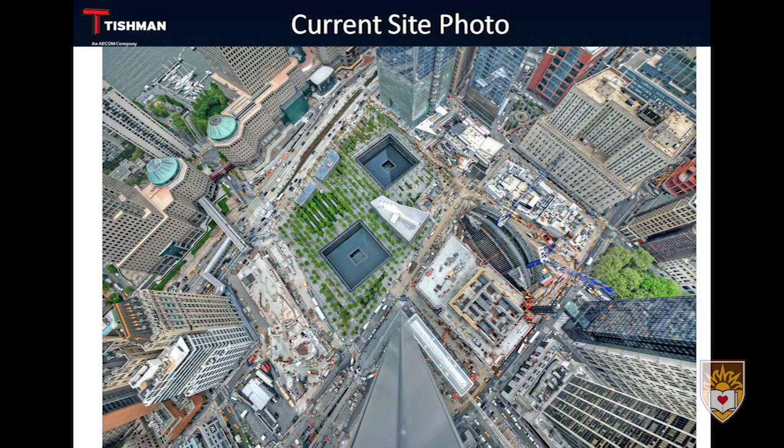Now, looking in plan view, I want to describe the complexity of the project. Most people don't realize that there's multiple projects. At the time of 9/11, the goals of the project were varied - there were conflicting groups that had different needs.

Obviously, first and foremost is to have a memorial and a museum to pay respect for the events of that day. Additionally, there was 10 million square feet that was lost, so that had to be replaced. It was always a transportation hub, but now they wanted to make it much more obvious. Something that was an afterthought in the original Twin Towers was the retail - turned out the retail was incredibly lucrative, so that became a #1 goal of the site.

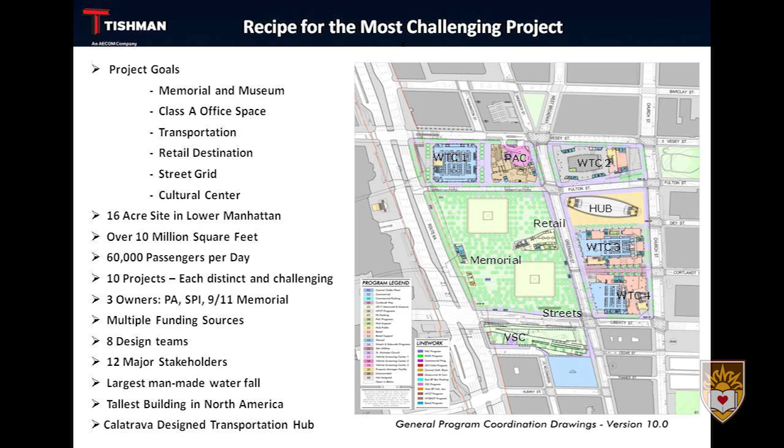They also wanted to reestablish the street grid. Originally there was a super block that came all the way around here - there were no streets coming through it. The urban planners felt that this kind of disassociated the site from the urban environment, so they reestablished the street grid back through the site here. This will be a walkway as well.

Again, I want to look below grade. Above grade, you saw individual buildings that look like a series of different projects. But really, below grade, you can see how the program spaces are all intertwined. You can't really tell how one building starts and another finishes.

You can see that at the lowest level, there are 4 levels below grade, a total of about 75 feet from street level. So it's 6 stories, but there's 4 levels below grade. The different colors represent the different program spaces.

There's bus parking through here in this pink color. Here's the railroad tracks that go to New Jersey, the PATH station. These are the outlines of the memorial pools, you can see them here and here. This is the lowest level where all the mechanical spaces of the building are, as well as loading docks.

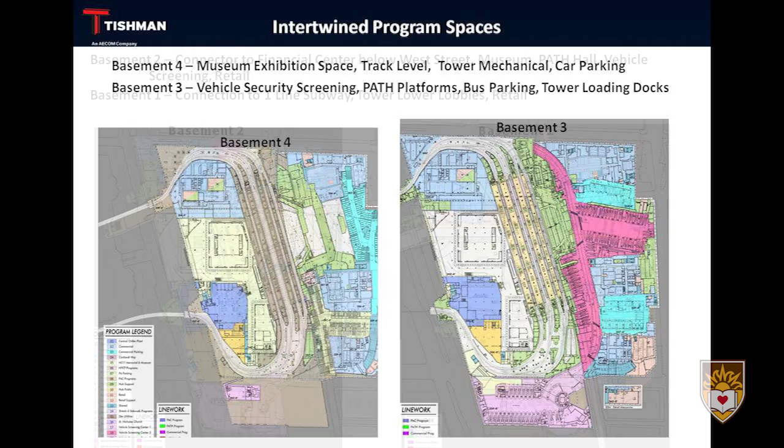As you move up the next 2 levels, this is where the retail space is, and you can really see the salmon color is all retail space. The transportation hub runs across the site. That's really what makes the site very unique, that the transportation project, although there's multiple designers and design teams, runs entirely through the complete site.

Very challenging, because there's a designer here, a world-class designer, Norman Foster, Maki, a Japanese architect, David Childs. So they're all very powerhouse architects, and they all wanted their building to be the way they wanted it. To get them to agree on below-grade space was a challenge, to say the least.

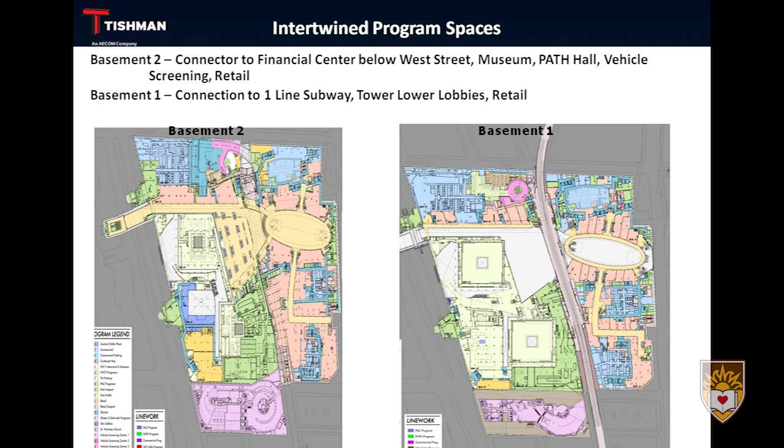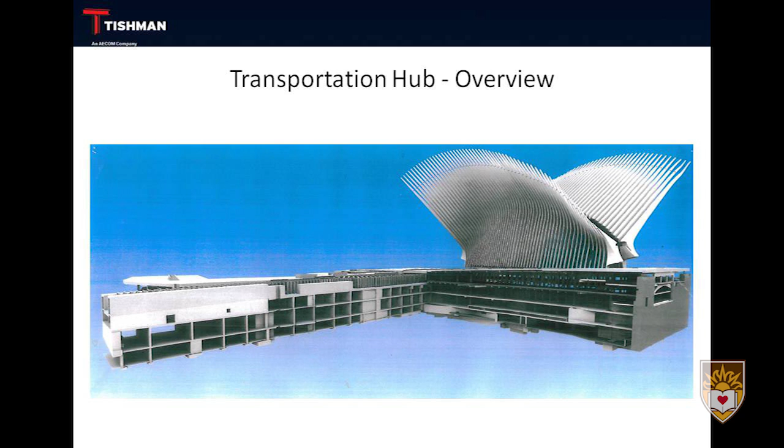To talk about the transportation hub specifically, this is just a model that gives you the idea of it in 3D, how it spans across the site. First, I just want to give you an idea of what the transportation hub is. Most people don't really know, they just think it's a train station. And it really is that simple, but above grade, this is what it appears to be.

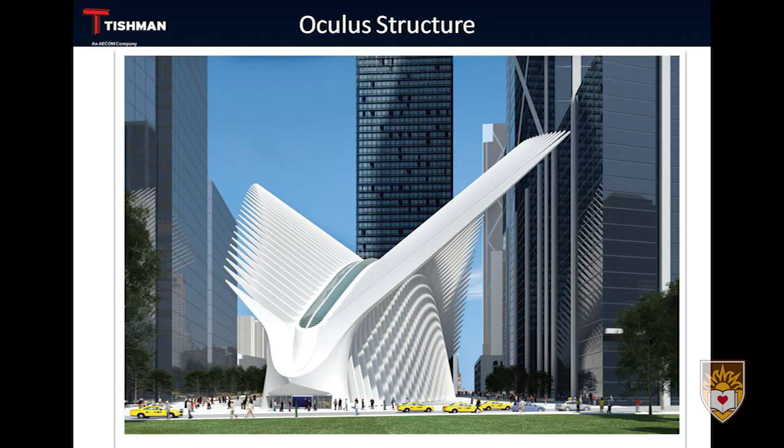Santiago Calatrava is the designer. He's a fascinating individual, an architect as well as a structural engineer and a sculptor. You can see through his space, this is all structure that he wants you to be able to touch and see, but these are actually steel pieces, going up all the way to the skylight, which opens. He wanted to create an expansive space.

He used light to make the area much freer and more welcoming. And it's at 2 levels below grade, so that was quite a challenge, to be able to introduce light into the space. The skylight, which you see here, does open, and it will open on 9/11.

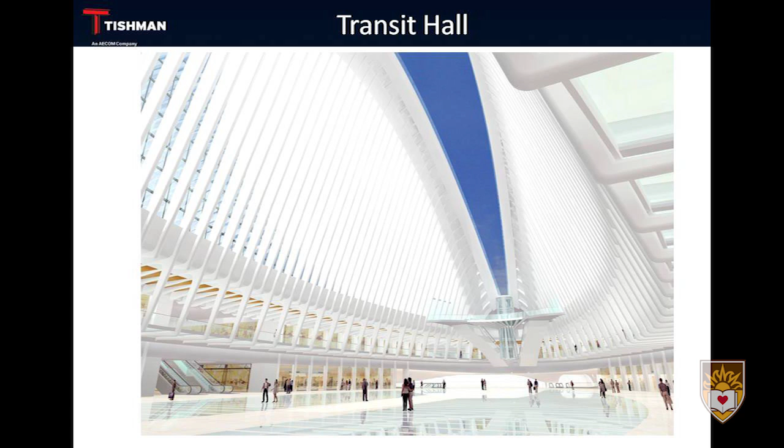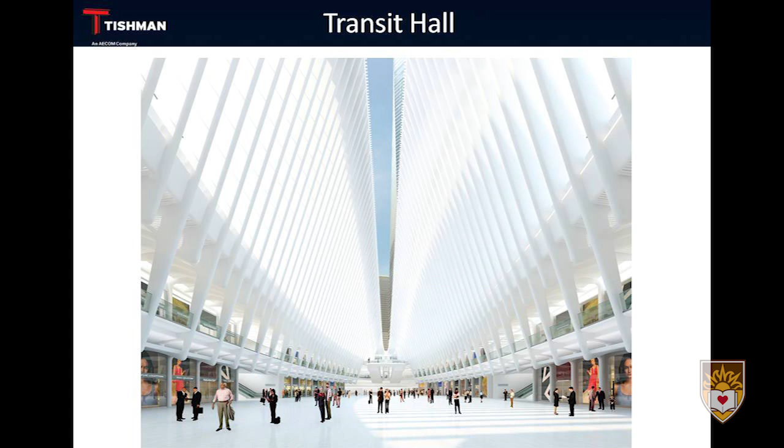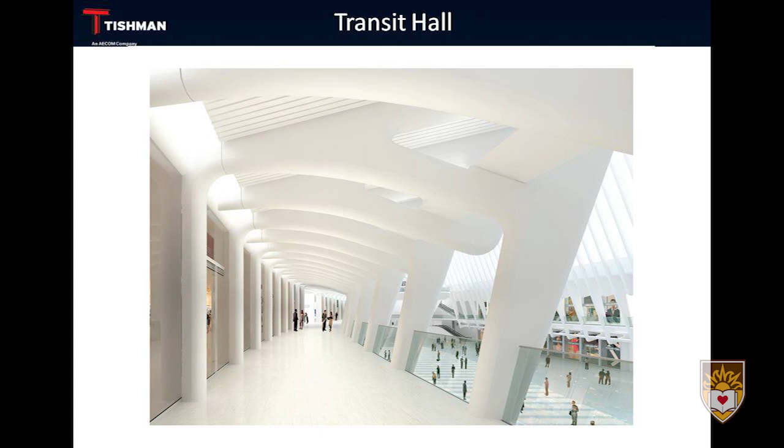Again, another view inside. And as I go through these renderings, we've finished some areas, and I've taken pictures of the actual site, and the renderings and the pictures are, sometimes I can't tell the difference. So it's coming to life very quickly.

So again, I want to emphasize how the transportation hub runs throughout the entire site. In this tan color, it goes from the World Financial Center across the West Side Highway, past Tower 1. Here's the PATH Hall, which is the mixing area for people taking trains to New Jersey, and the Transit Hall, primarily a retail space, through Towers 3 and 4 and Tower 2.

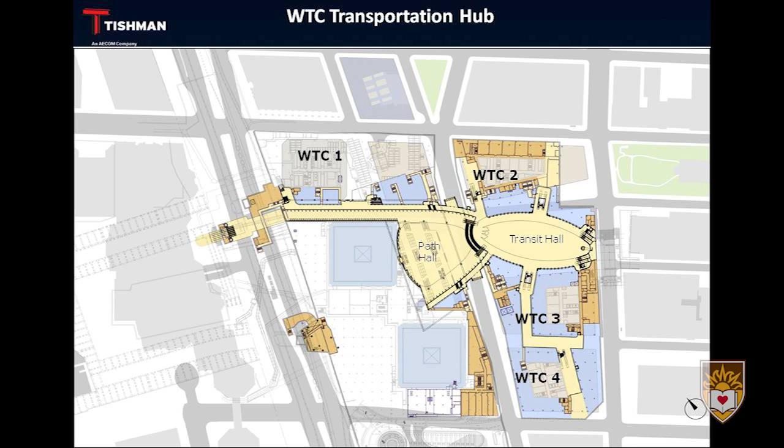Now these towers all have different owners. Towers 2, 3, and 4 are owned by Silverstein. Tower 1 was originally controlled by Silverstein, but it was turned over to the Port Authority. So the whole idea of having this retail space with these 10 million square feet that we'll reestablish, with retail running through on every level, is really one of the driving factors of the below-grade program space.

Just another cross-section that shows some of the complexity. The building actually attaches to and connects to the MTA programs, the Fulton Street station. So this is a unique situation where the Port Authority and the MTA, two government agencies, actually cooperated and worked together to develop this connection point.

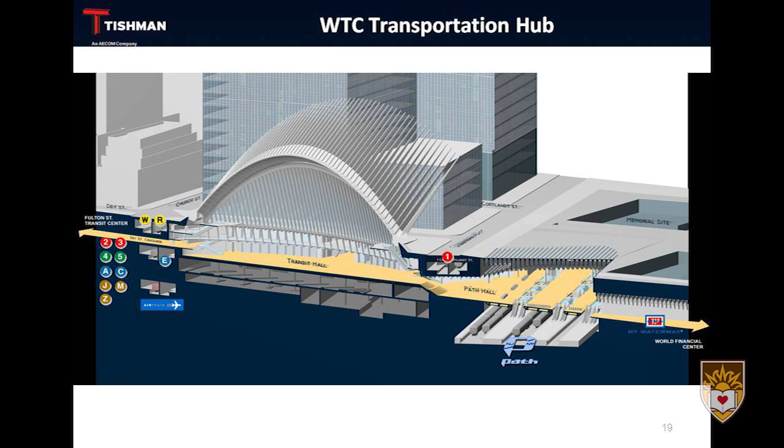So it's now possible to go from the World Financial Center and walk across the site, and even all the way to the East River across Lower Manhattan, below grade. And you can shop the whole way. This is looking further east, the other stations that were done by the MTA, projects that were coordinated.

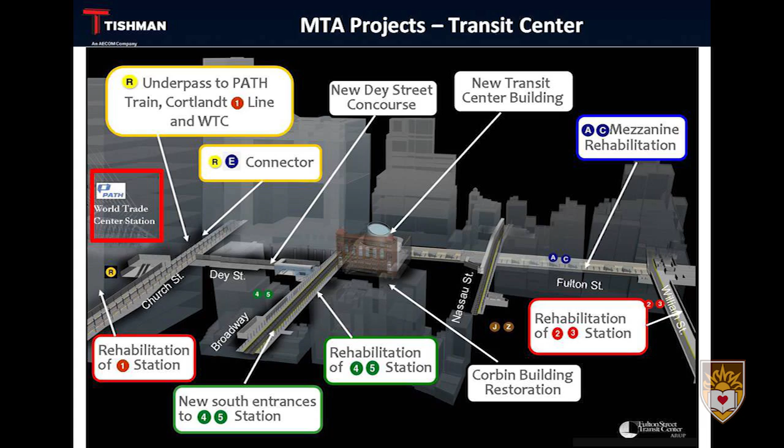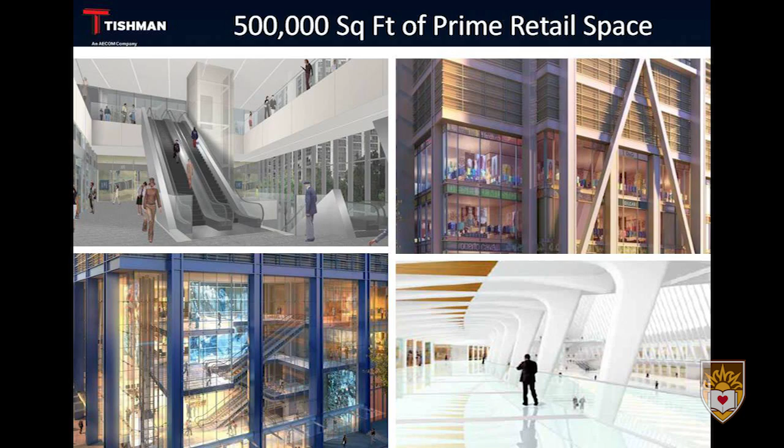Again, I just want to emphasize that retail is one of the critical pieces of the project, one of the main goals. So in each of the buildings, even above grade, there'll be retail space. And don't forget that it's a train station, an active train station. We're building this ginormous project in and around the existing PATH station running through.

So I want to just focus in on little engineering topics. First, Greenwich Street Corridor, which is top-down construction, a kind of unique way of building a building.

So Greenwich Street is this section running right through here. Below it is the one-line subway. You can't see it, but directly below here is the one-line subway carrying, I think, 20,000 people a day. It's up on piles right now, at this point in time, going back to 2009.

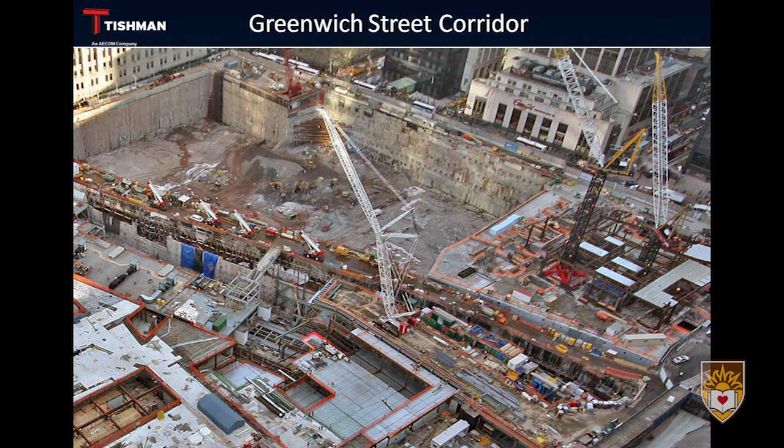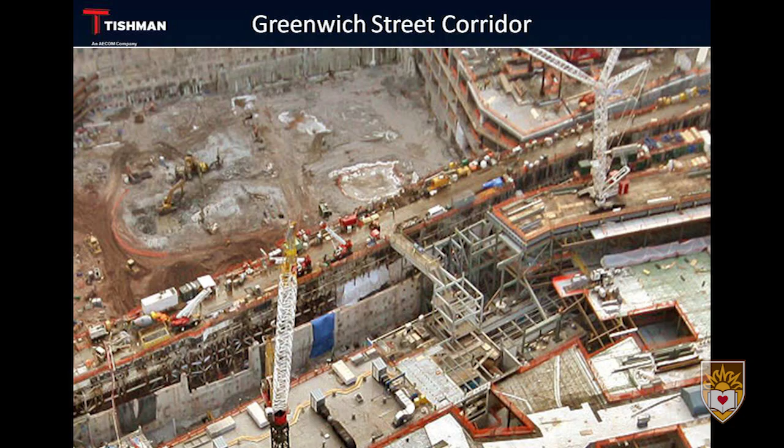Just zooming in, you can start to see these piles which temporarily supported it. The one line was designed to be sitting on earth, and we needed to excavate below it while the trains were running through it, and insert, if you will, slabs - 4 levels of slabs.

Another view from the opposite side, it's 1,000 feet long. This is where Tower 2 will be. This is where Tower 4 is. It's built. This is Tower 3. And you can see all the stilts, but there's all earth underneath the structure.

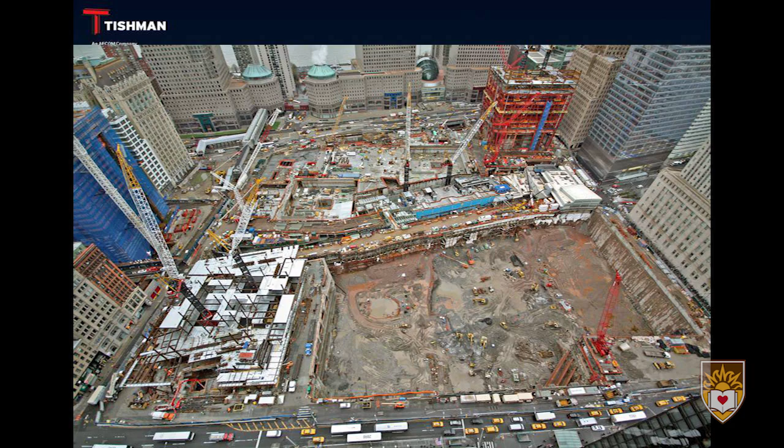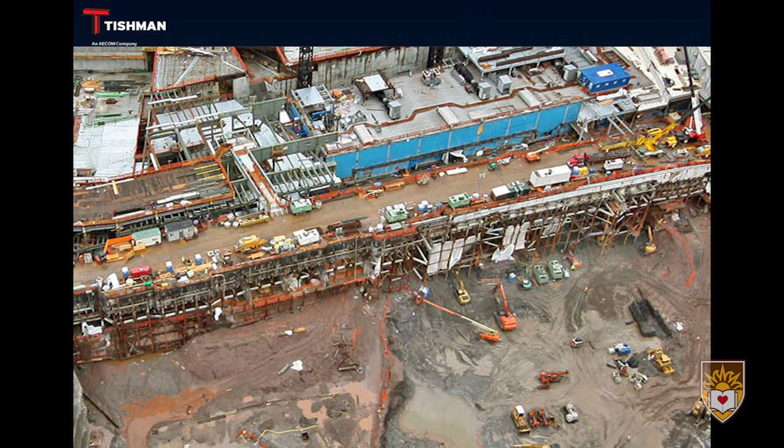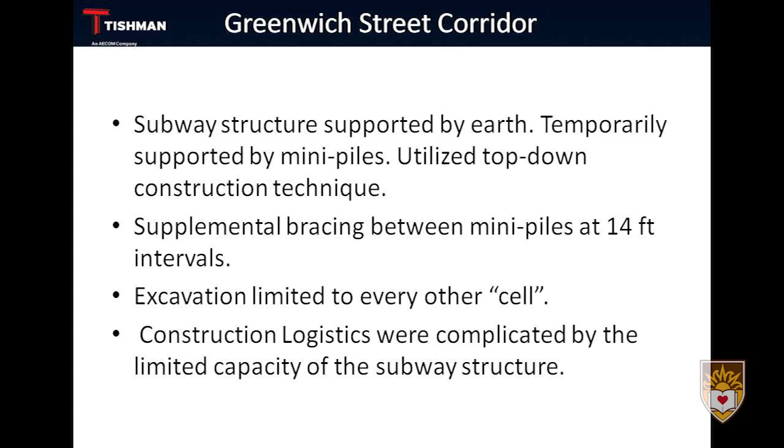As you zoom in, you can kind of see the structure. Top-down construction is where you build one level at a time. You excavate underneath that slab that you've placed, take that earth away, and then build your next slab, and again repeat that - excavate underneath.

It's a little counterintuitive, but the alternative would have been to excavate all the way down with temporary support, as you see something like this, and then build back up, and that would have delayed the project by at least a year. So we came up with the idea of building on our way down.

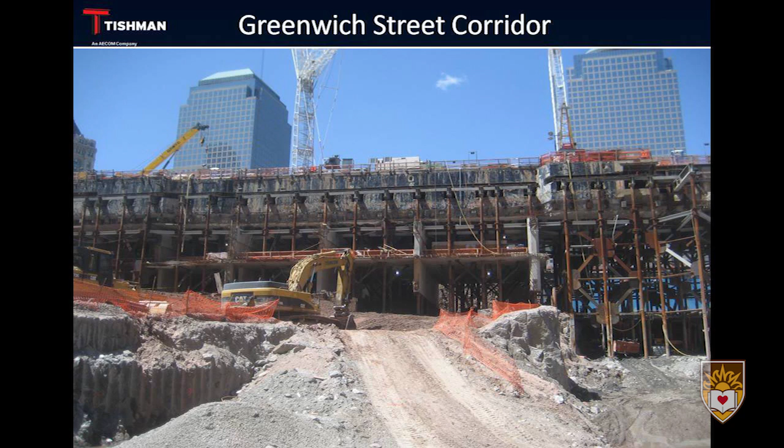And here you get a sense of it. You see this slab here, and there's a wall, and as we zoom in, the wall is just kind of hanging in the air. It's a little surprising. It hadn't been done in New York City. There were a lot of people who were doubting that this would actually work.

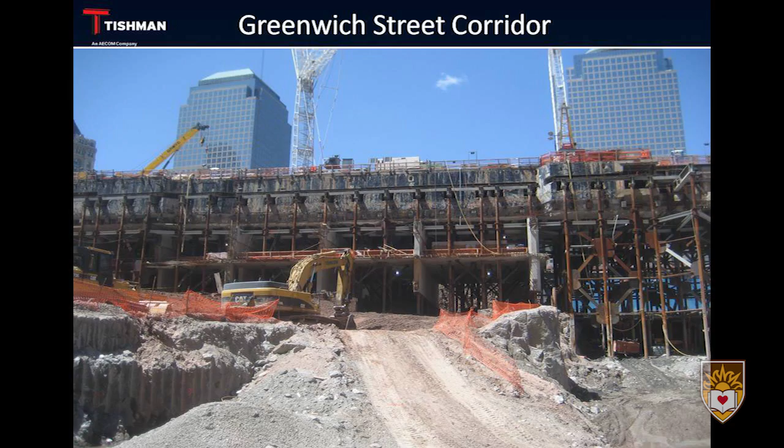You can just see the construction, the excavation, as we're digging underneath the slab and continuing working our way down. Very unique construction. And in this area is a complete bridge, so we have it fully supported, and then we continue to excavate. We used explosives at this base while the trains are running through here 75 feet above.

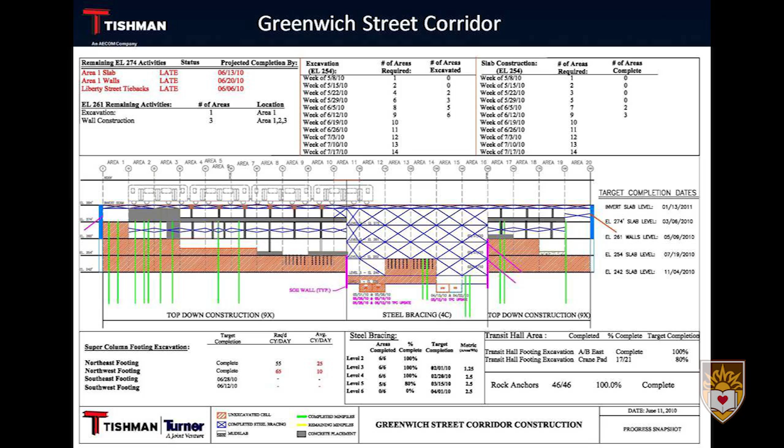This is how we'd keep track of where we were on schedule. We would walk through weekly with the director in the mud, identifying where we were on schedule, whether we were delayed. You can see that in red, we tracked it day in, day out. It was very challenging to have, under that kind of pressure, to be able to walk the site and assure them that we would get this structure completed in time for the 9/11 memorial opening.

So this just keeps continuing, just the difficulty in excavating below and within the structure and the type of environment that we're building under.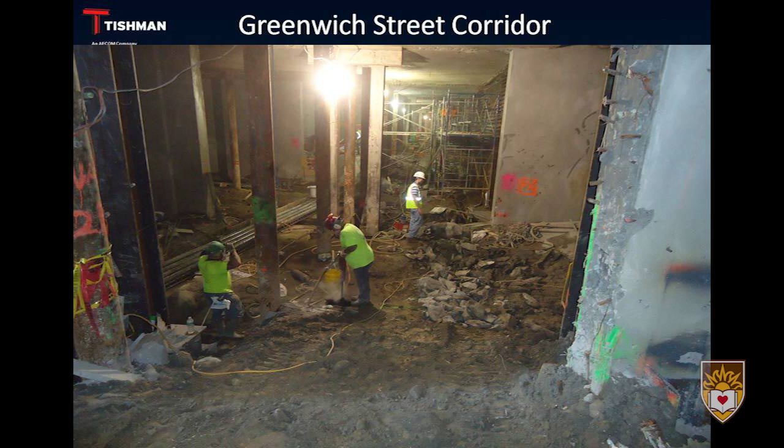A lot of work is done by hand. You would think that in this day and age, with all the technology, that construction would be done in one rapid way, but this little Bobcat had to take out 25,000 cubic yards. This carries a third of a yard. So it's like digging a swimming pool with a teaspoon. And we had 10 of these zipping in and out of the site, bringing it out to an area that would be loaded out.

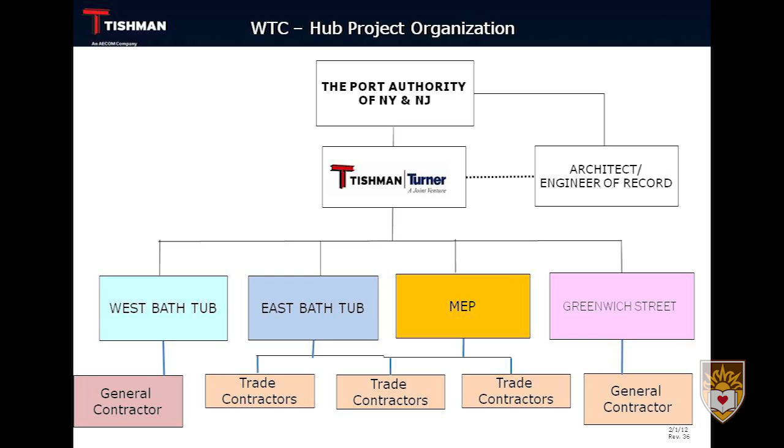Just a little bit about our organization. Something that's unique is that the Port Authority typically deals with a general contractor. In order to proceed, the West Bathtub was required to meet the needs of 9/11, which we'll talk about a little later. The East Bathtub, we decided to go trade-by-trade contractors because at the time, Silverstein was not proceeding with their buildings. So we said we could build trade-by-trade and allow the project to move forward somewhat in pieces. So when we came on the project in 2009, Tower 1 was just coming above grade.

What happened was that in 2010, we had just started on the project, Tishman Turner, as a joint venture. After 2008, Silverstein decided not to build his 2 projects. The hub had terminated the contractor who was doing this - it was a general contractor. And we came in and said, okay, this needs to be finished by 9/11.

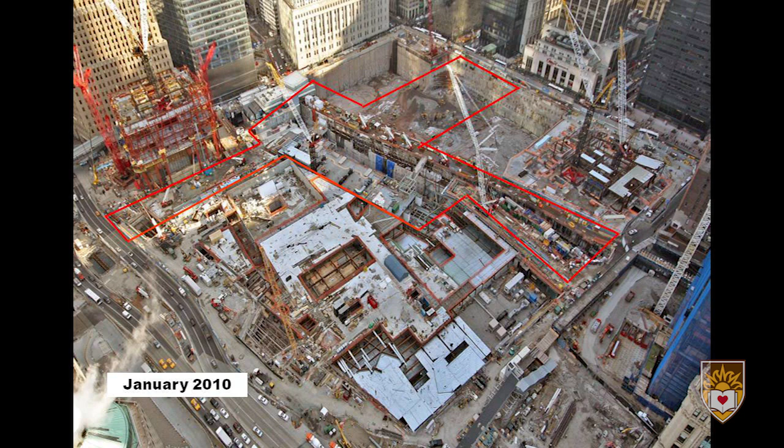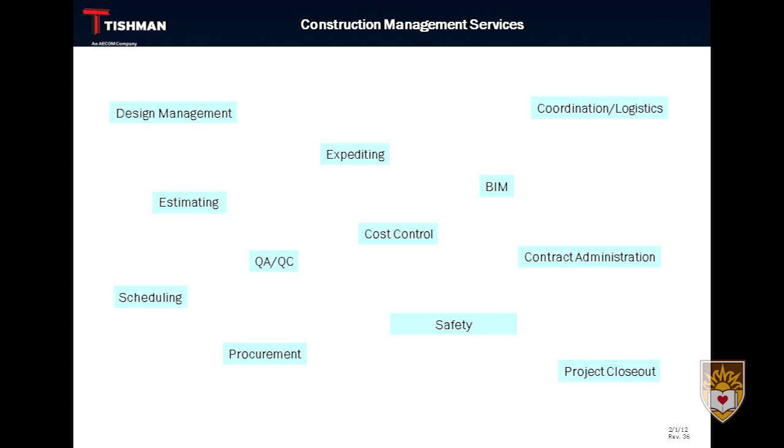We went ahead and with the general contractor, divided up this area and said, okay, we'll build this with a general contractor, and this area we'll build trade by trade. These are all the services that we typically provide. It's more of a Tishman commercial, so I'll kind of skip over that.

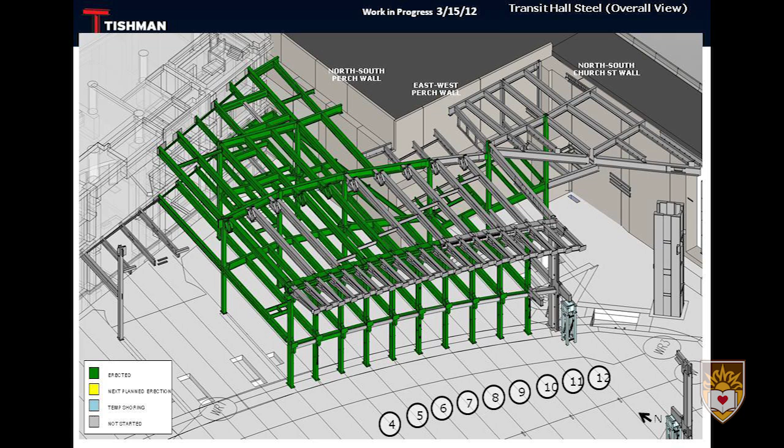We extensively use BIM to plan the work and to actually detail it. You can see the realism with these pictures. These are used to identify clashes, and we use it to track the work and how we proceed, where each piece is installed, whether it's welded. It's very realistic. We can rotate this — it's just a snapshot of a 3D model that we use.

Just talk a little bit about logistics. So I mentioned that all these different projects, every project's an individual project, and each really wants to have nothing to do with the other. We're separate project teams. Although Tishman is building many of the projects, we're probably the worst neighbors you could imagine — kind of like two brothers in an Irish family, how they would fight with each other.

So we sat down and identified where the tower cranes would be located, where the crane picks would be located, and the gates that would be available, using different colors to identify the different projects. Surprisingly, this worked out incredibly well. It differed drastically from the Port Authority's original concept of just one big project with everyone working together.

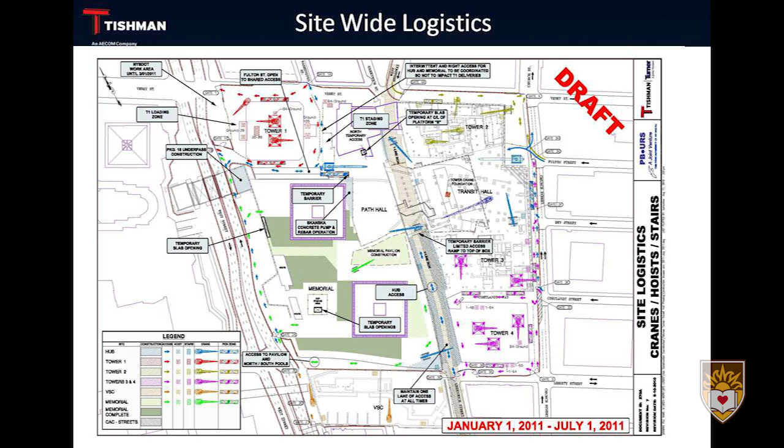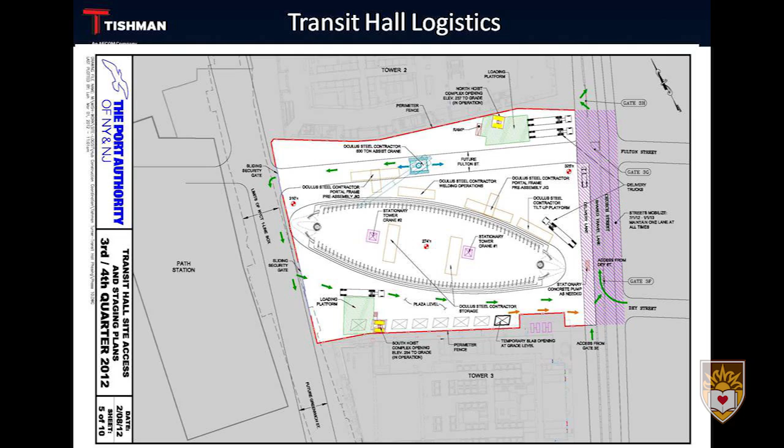On an individual basis, we planned our cranes, our locations of our cranes, where every delivery comes in. We have planning for over 10,000 employees working at the site, hundreds of trucks. The downtown neighborhood was very concerned about the backup, the traffic, the diesel fumes — a lot of concern about how all these materials would get in and out of the site. So we planned for where every delivery was located.

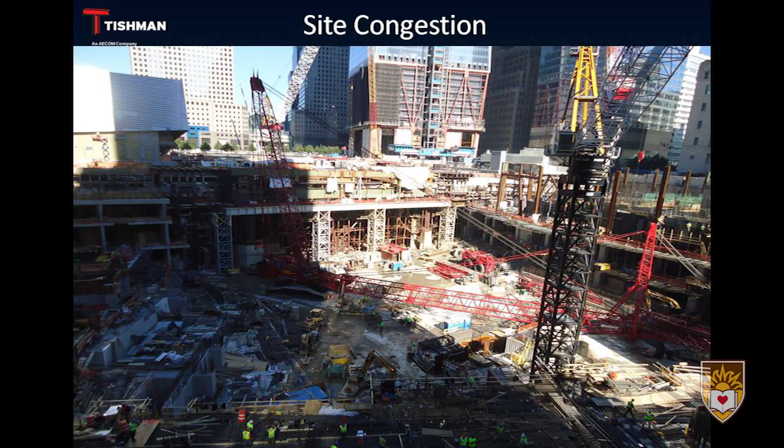I'm going to talk extensively about the challenge of how we planned out a very congested, detailed plan of the work. But first, I want to talk to you a little bit about the cranes. Cranes are really the heart of every construction project.

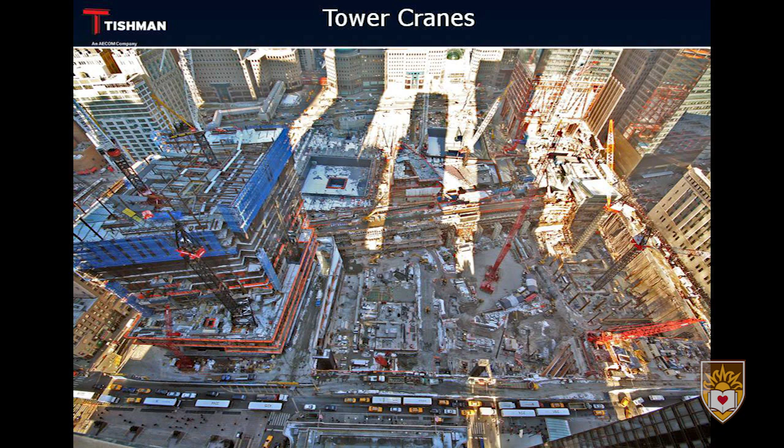And here we have quite a few unique, different ways of dealing with them. Tower cranes, primarily — especially in New York City, on Tower 1 you can't see them, but they're all the way up. Tower 2, Tower 4, Tower 3, we all have tower cranes, except for this one big red crane. This big red crane was needed to set steel on this side for the memorial.

But we came up with different ways of picking steel. We used sliding cranes — this is a tower crane with the capacity that's needed, but we were able to slide it on this platform and move it all the way to the street to pick the steel we needed, then slide it back to set steel where we wanted to. Here's another example of the sliding crane moved all the way over to Church Street — the site is still congested but very organized.

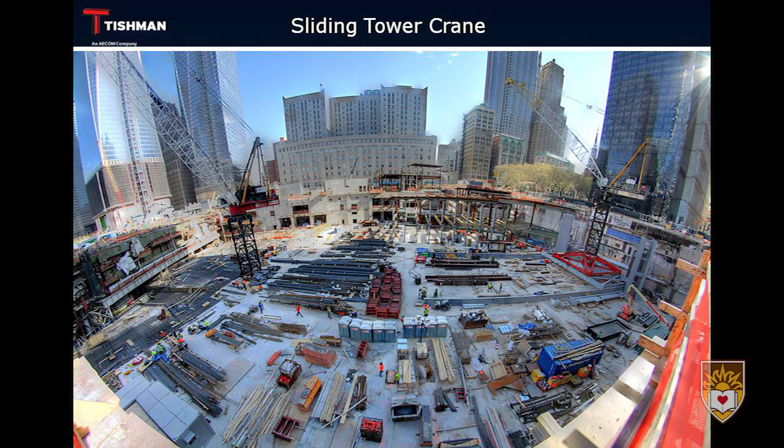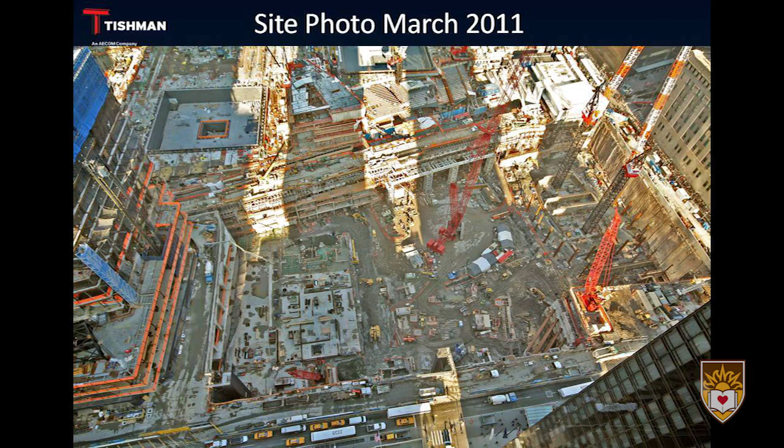In March of 2011, we were struggling with steel, very challenging steel that had to be set. There's a bridge across this site, right through here — it's actually a 150-foot long bridge. This crane needed to pick that steel and set it on this side, which was the memorial. Now you notice the date, it's March 2011.

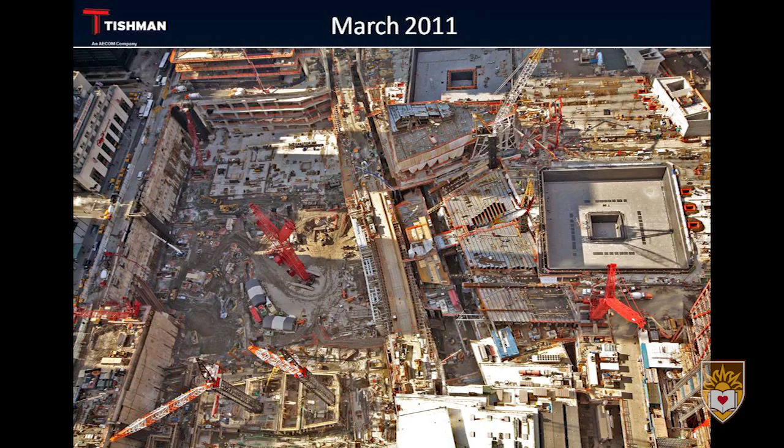The mayor had said that the memorial will open on the 10th anniversary. So in just 6 months, we needed to finish around the pool. Just another view — you can see it's by no means ready to accept people coming in. And if you may not be familiar, the names of all the people who were lost on that day are inscribed on the wall of the memorial.

So we needed to complete at least 25 feet around the memorial so that everyone coming to the site could find a lost loved one or someone they wanted to pay respect to. At the same time, I mentioned about digging with the teaspoon — it turns out that digging with a teaspoon on the Greenwich Street corridor is very slow, and that was running a little bit behind schedule. So that excavation continued along the Greenwich Street corridor.

The project, the Oculus, needed to start at this point in time. But still, this big red crane, which was primarily setting steel on this side, was in the way.

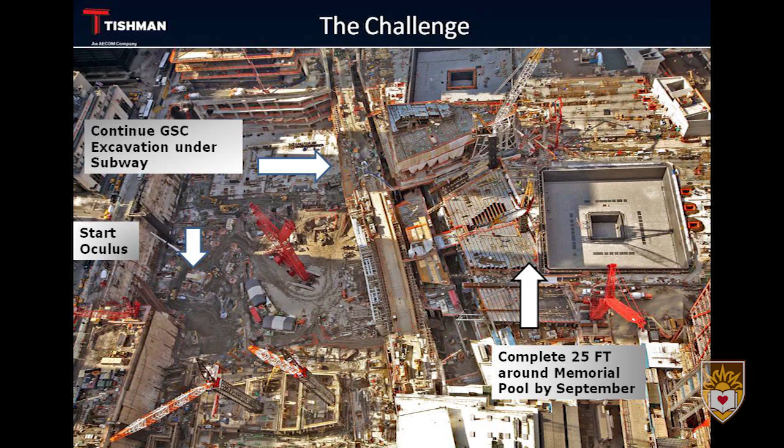And you can see the path of the excavation coming to this crane to take the excavated material from over here. So it was quite a challenge to start the Oculus and complete without jeopardizing this work, this side of the project. So we modeled it.

We showed the Port Authority that we could probably start the foundation work and work around the red crane and keep setting steel. We modeled periods of time showing the different movements of the project and how it developed. Afterwards, I looked back with the site photos, and amazingly, it worked exactly as we planned.

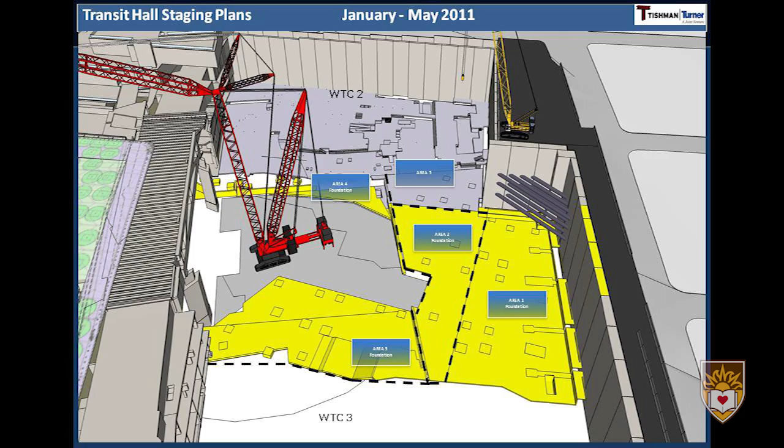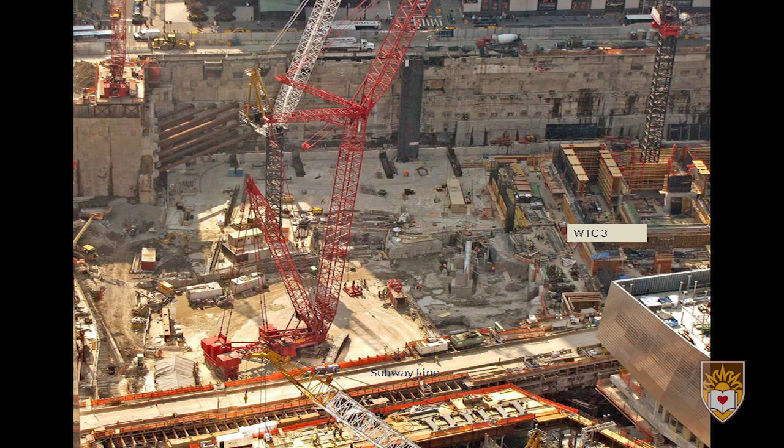So here's just how we would proceed setting the foundation walls and continue to move forward in this area. This notch was actually needed to allow this crane to roll into the site. And here's a site photo showing there's the crane, and here are the slab and the foundation work starting.

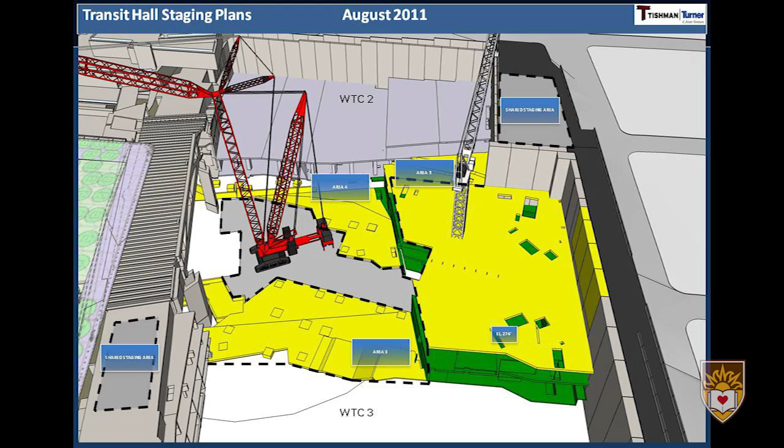By August of 2011, we thought that the crane would be ready to leave. You can see the crane's ringer portion is on. It's now August. We've advanced the construction. We're at 2 levels now, and the tower cranes are both erected.

By September of 2011, the crane is in a position where it doesn't have the ringer portion anymore. It's been dismantled, and here it is actually on its way out. We're 2 levels with concrete here, well advanced with the construction in this area, and this crane is on its way out.

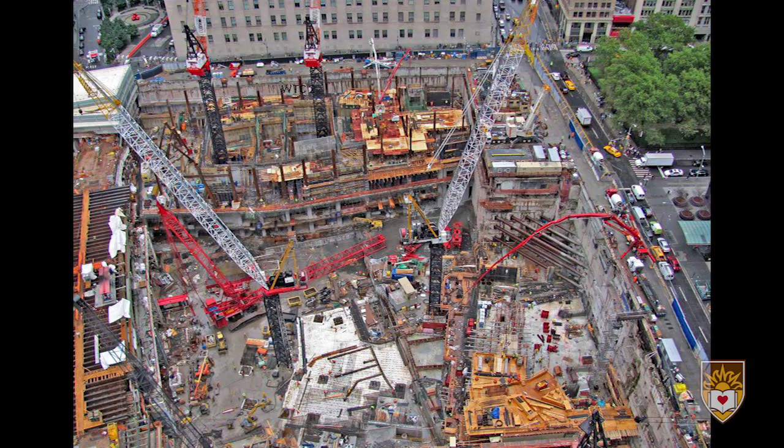We definitely had our doubters that said that we couldn't get it out. I don't know if any of you know the story about the little steam shovel that they built the building around. We had that same idea — we said, if we can't get it out, we'll just paint it white, and Calatrava would never know.

But as we move forward, we continue with the plan. Both tower cranes erected, moving with the trades working together. Foundation work still needed to take place here. The trades were incredibly cooperative — union contractors working with each other. It was really a fantastic effort to see.

Continuing month by month, starting steel. We needed to pick up time. We were under obligations to Silverstein for his towers 2 and 3. They were progressing, and we needed to keep pace with them.

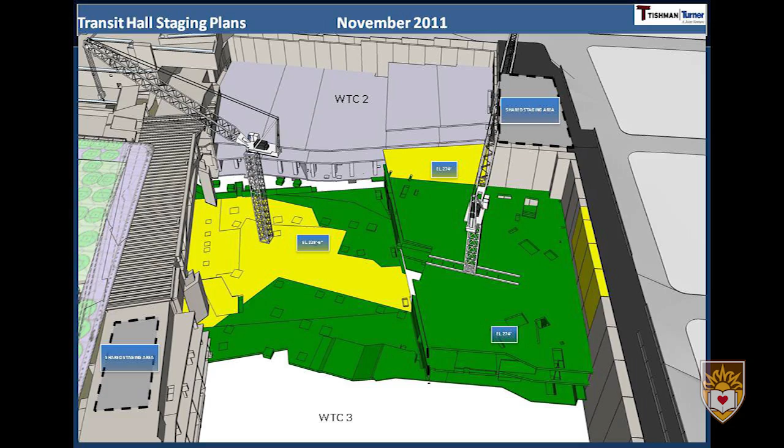So we're setting steel again, with concrete work taking place. This is unusual in New York — usually you don't have a steel contractor and a concrete contractor. In this case, we still have the foundation contractor, all occupying the site at the same time. There are liability issues, and just the planning and cost of being able to do this work.

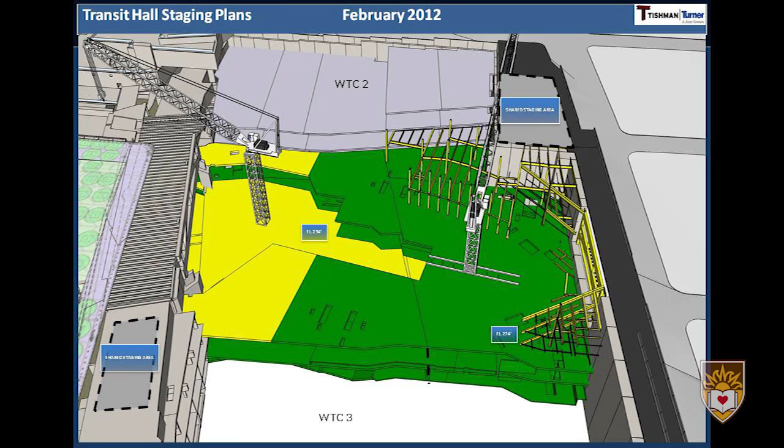Again, we were able to just plan it out. This was done months and months in advance of how we would set the sliding cranes and then set the steel and drive to our completion date, which was the end of 2012.

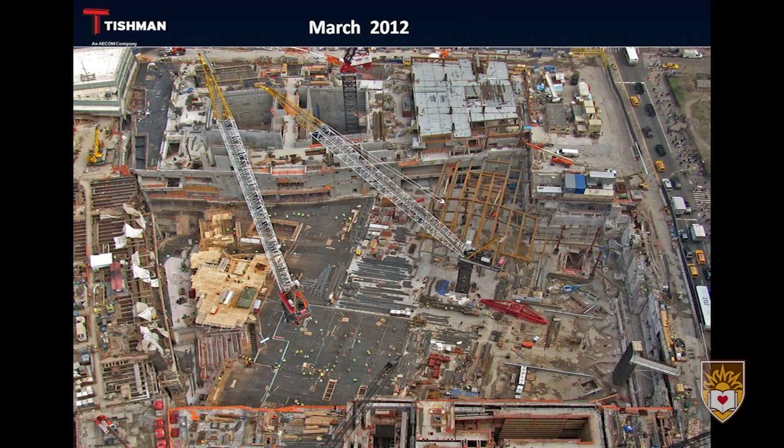We needed to have our work completed to grade. Otherwise, there would be huge damages paid to the Silverstein projects for Towers 2 and Tower 3. The odd thing was that we depended on — you can see this steel actually depends on Towers 2 and Tower 3 to land into those buildings.

We don't have any columns within the Oculus itself, so we needed to have these buildings in place. But yet if we didn't make grade in time, we would have a penalty — the Port Authority would have a penalty of $300,000 a day.

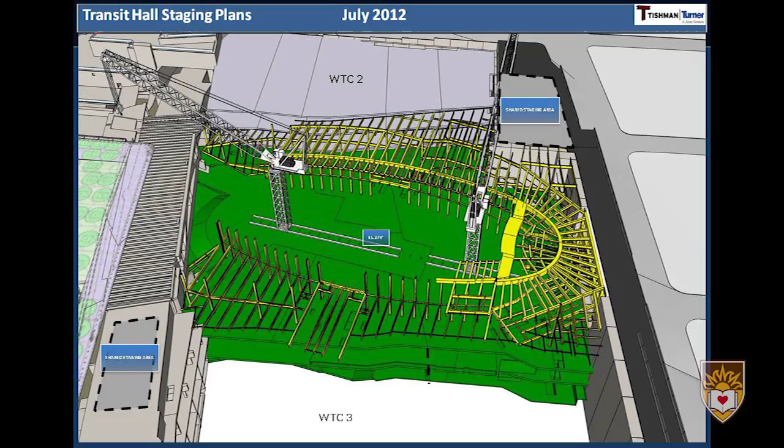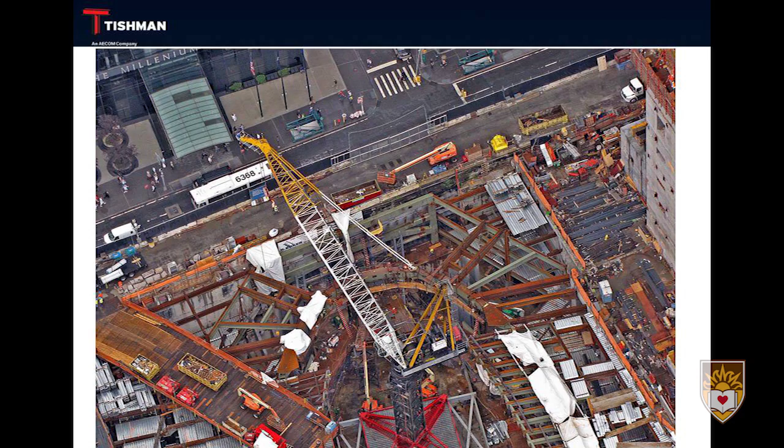So we continued into July, the site matching up the challenges of this just unique structure. You can just see some of the unique steel that's in place. We had to build this platform because the steel was just so heavy that we needed to be able to drive the steel here so that this crane could pick it.

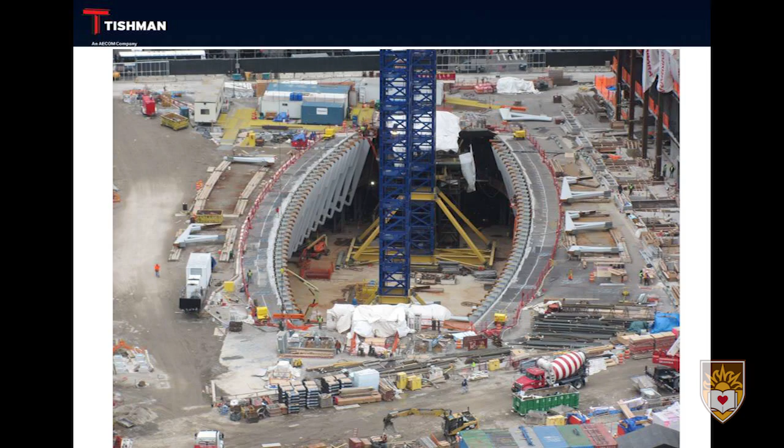I'll just remind you that at this time, October of 2012, Hurricane Sandy hit. The site was inundated with 40 feet of water at our lowest level. We had the U.S. Army Corps of Engineers come in, planning with us how to get 125 million gallons of water out of the site. By the 10th day in, the Army Corps had a plan for getting the water out. At that point we said, listen, it's been 10 days, we've been pumping water, I think we got another 3 days left - you guys can probably go help somebody who needs it more than us.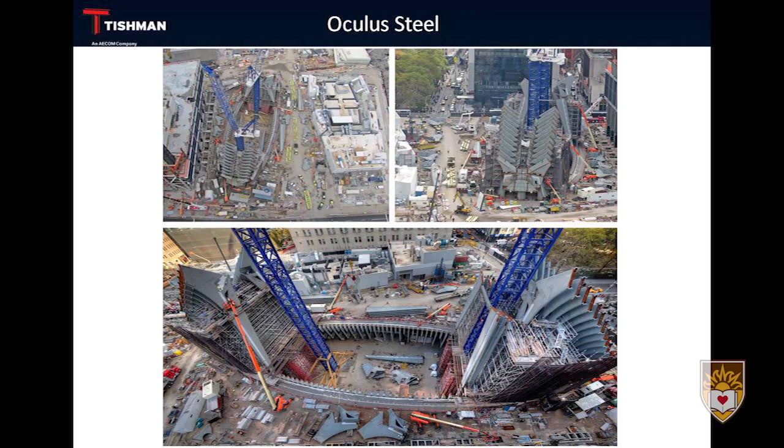So now I just want to talk more about the Oculus steel. Very unique structure, as you saw in the prior pictures. It's a different contractor. It starts below grade and is coming out of the ground at this point. Very unique geometry. With BIM, you're able to plan everything out, visualize it, and locate it.

And as this is done, it allows square buildings to be easily built. Well, this is anything but a square building. The site slopes down, there's a curve - it's really quite a challenging project just to get the geometry correct.

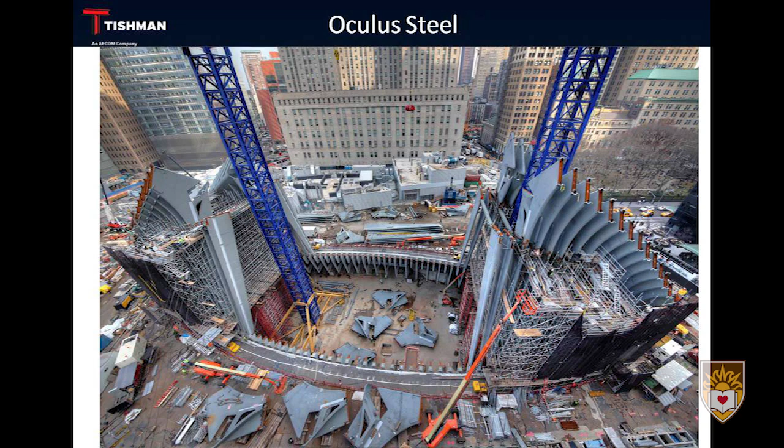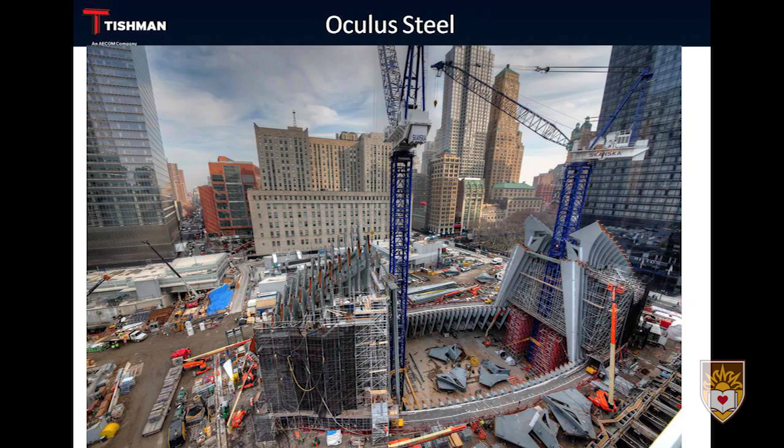Calatrava was very helpful with me. One of the items I dictated was that we did not want these cranes, which were originally planned to go all the way down to the lowest level and into our mechanical space - they would have prevented the mechanical work from proceeding. So we said we need these cranes to stay at this level, and can't have any shoring. What you see here is not actually shoring, it's just light gauge scaffolding for the workers to work on. So we kept all of the supports outside of the building.

There's cables that run to the ground. The idea being we wanted to be able to advance work at the lowest levels as well as on this level while the steel was being completed - or at the point that it's just completed, we're ready to go. And Calatrava was actually very helpful with me.

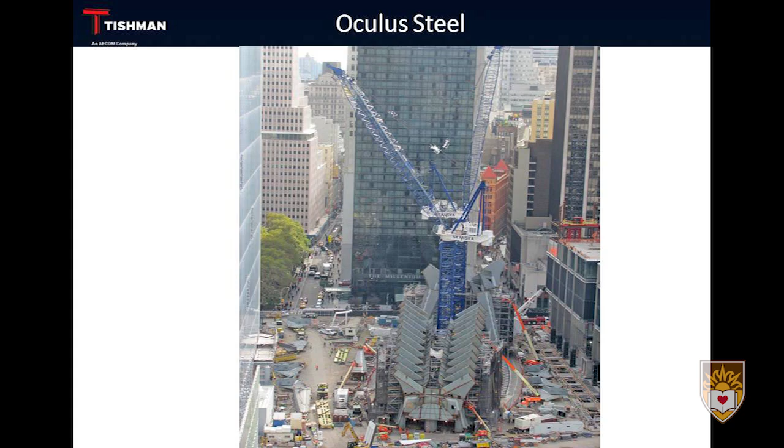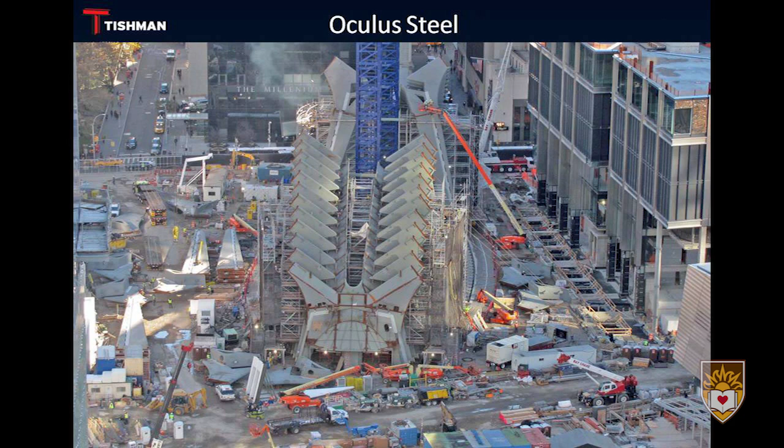He spent several hours describing the dynamics of the project. This is actually being built like a bridge, where this piece relies on the prior piece, which relies on the piece before, all the way back to an abutment, much like a bridge. You can see this is the abutment area, and it's not actually supported in any way other than this arch, which brings the loads back into the abutment area.

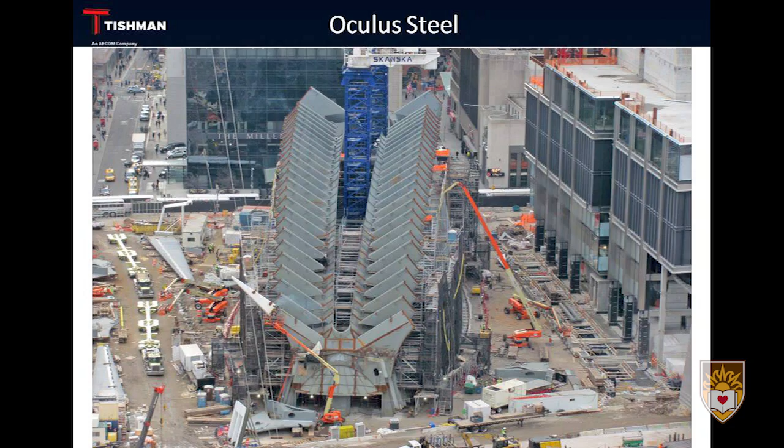As we're nearing the end, setting a piece a day, you can see the complexity and congestion on the site - all these pieces, the equipment, and the welding. There's really quite a dance that has to be done, and it's not by accident - it's thought out, it's planned out. Things change, so you're always dealing with the changes that happen day in and day out.

Aside from Hurricane Sandy, we had an earthquake, and we had an earlier tropical rainstorm that caused as much disruption as Hurricane Sandy. So these are the things that you deal with day in and day out.

You can see the shape starting to come forward. These pictures are from the December and January time frame. At this point, the steel is on site and we're actually closing the arch. We set our keystone piece, where the two pieces come together, and you hope you did a good job so it fit. That piece was set just the week before last.

So we are at a point now where the project is really advanced, and we can see the end in sight. There's one of the final pieces going in. This is just looking up from this lower level, and you get a good view of some of the complexities from an earlier part of the site - this is a solid piece of steel which will hold the stairs and the escalators.

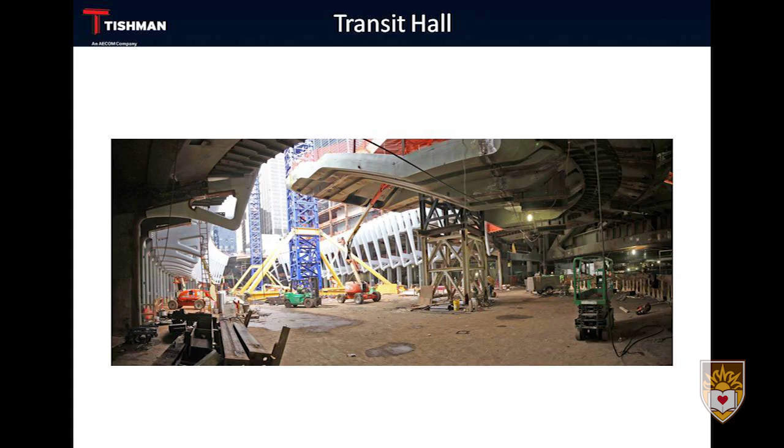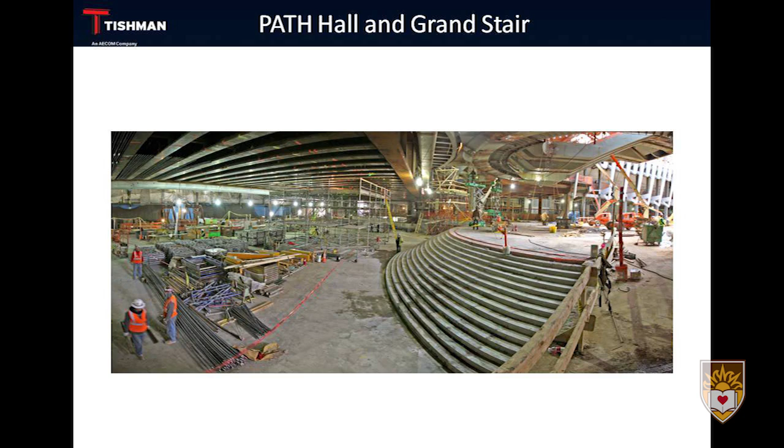It really is a sculpture. You get a sense of it below grade. Now as I walk below grade and start to see it coming together, it's really remarkable. This is the one-line subway - the subway is running through. These are the grand staircase. This gives you a good sense of the symmetry of the building.

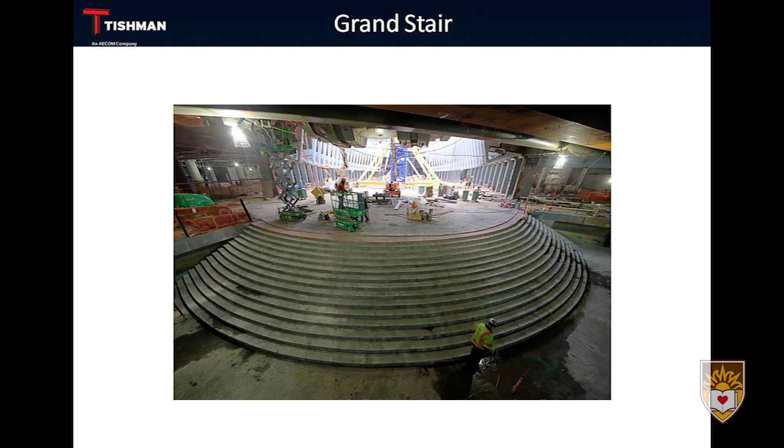So this is the finished station now, showing one level. At the lowest level we have the tracks, and as you go across, this is platform A, B, C, and D. This is as it is today.

Platform A is finished, the marble's in place, the work is done, it's being used. Platform B is under construction. What separates these two is a plywood wall, just a matter of inches. This is platform C, a temporary platform put in place after 9/11, still being used today. And this is platform D, again separated by a plywood wall, just a matter of inches, from the project.

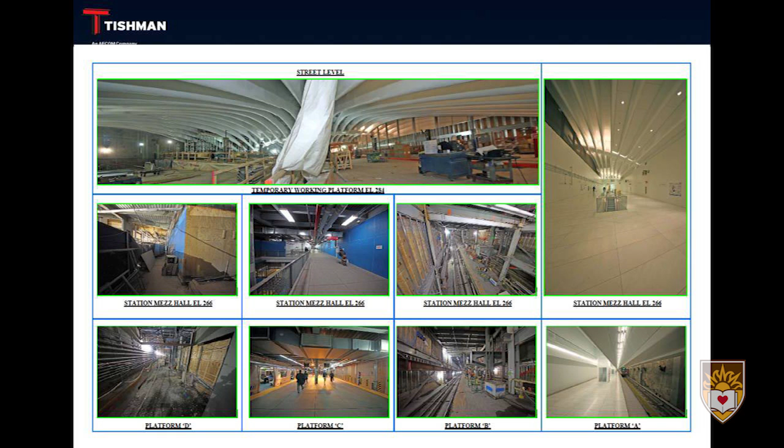You go up one level, and the same thing again. Here's the finished marble, and above us is the memorial. This is what's under construction, again just a plywood wall away. So that's really some of the challenges you see on the project, working in and around an occupied train station.

The different owners, the different architects, I think it gives you an appreciation of the challenges of 2008 when Silverstein wasn't proceeding with his buildings, how we would think of a way to keep moving the projects forward, and the tools we used to allow us to move the project forward.

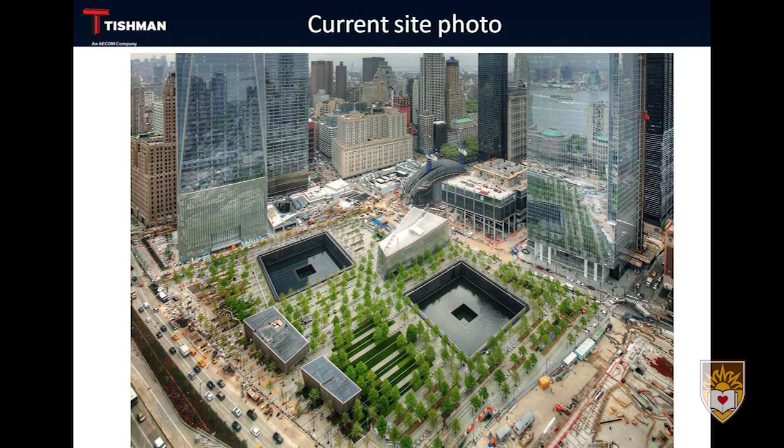David Childs, the architect, wanted to do something different. This is quite a challenge, to be able to introduce light into the site, not to make it look like a concrete bunker, and to keep it light and airy, which I think he achieved in this design. Originally, his design was actually glass prisms that would refract the light, so during the day it would shimmer.

I went to China to actually test this unique way of doing the podium wall, and we did a mock-up. It all worked, it was actually gorgeous. But unfortunately, when we went to do the actual production runs, the glass couldn't withstand the temperature that was needed in the event of a fire, so it would actually kind of explode. And that was certainly not something anyone would want.

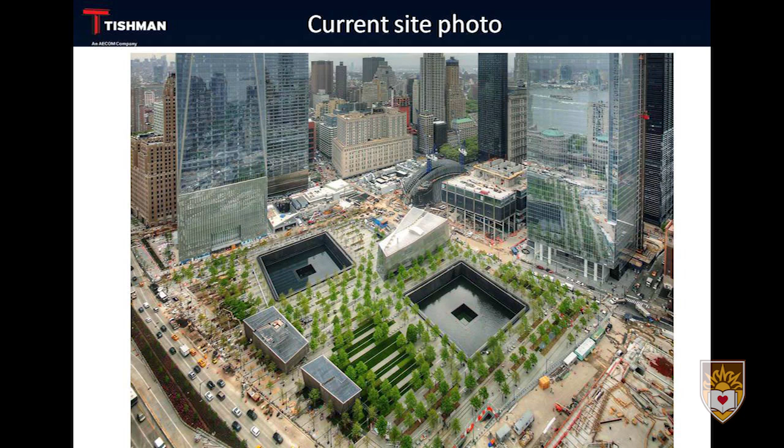So they did come up with this very late in the game, this design, which I think is actually a beautiful design that they came up with. That does represent, from here to there, 200 feet of lobby and mechanical space. And then the glass starting at this level is all blast resistant.

It was tested, we tested it out in New Mexico at a facility that the government uses to test bombs, and we actually set off a bomb similar to the one in Oklahoma City. There are 3 layers of glass, and when we set it off, only the outermost layer of glass broke, which was really impressive. We were hoping it would break on the inside and not fly across the space, but in fact only the outermost broke. So it is an incredibly robust building.

Well, for those of you who are architects and engineers and familiar with Calatrava, you just say that name and everyone knows it's really, really expensive. In fact, in his presentation to the Port Authority, to the commissioners, it was so moving. The shape of the oculus structure itself is meant to emulate a dove leaving the hands of a child. It was a fantastic presentation. But the commissioners, with their fiduciary responsibility, said, well, is it going to be expensive? And he said, but of course.

So we did budget the project, and the budgets are sometimes, frequently, politically charged, so it wasn't always appropriate to put out that number at that point in time. But the numbers that we put forth, and realize we also came in at 2009, so the design was fully done, the cost is what we thought it would be. I think it was 3.9 billion. That's the number, and there's a lot of publicity - that was originally 2.2.